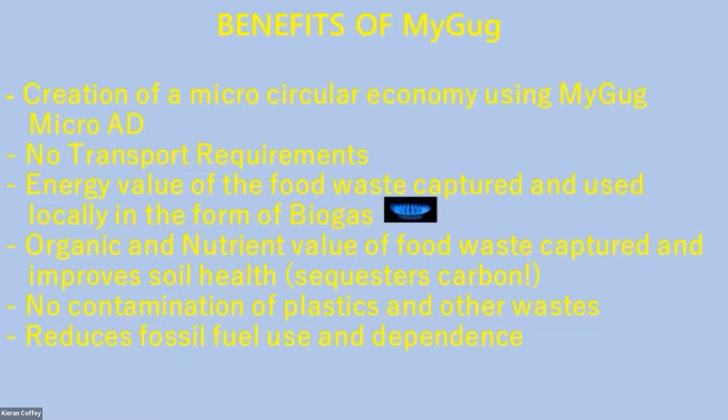And the beauty of anaerobic digestion is that you capture the value of the energy that's in your food, and you can use it locally in the form of biogas. You also harness the organic and the nutrient value in your food, and you can reuse it locally. And there's a big issue with soil health in the world. This will improve your soil health, and it'll sequester carbon.

And one key issue for us is that when you treat locally, you will not get contamination of plastics and other wastes, deeming them useless as well as the food waste. So this is a very important point as well. And with all of the above, everything will reduce your own fossil fuel dependence.

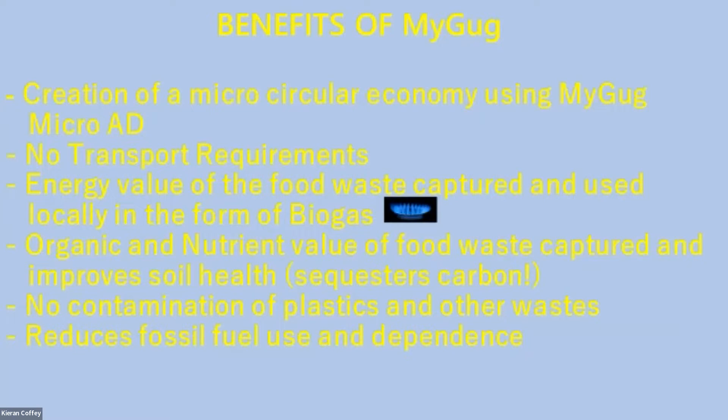Now, as I said before, the big difference is that you get a gas from your digester that you can use locally to cook. And a domestic digester can give you up to 80–90% of your cooking gas requirement. And instead of a solid compost waste that you get from a composter, you get a liquid fertilizer that you can pour directly on your plants and vegetables.

Now, also one huge difference between the two is that MyGug is a full solution for food waste. It'll take cooked, uncooked meats, it'll take liquid waste, whereas the composter is only a partial solution to food waste.

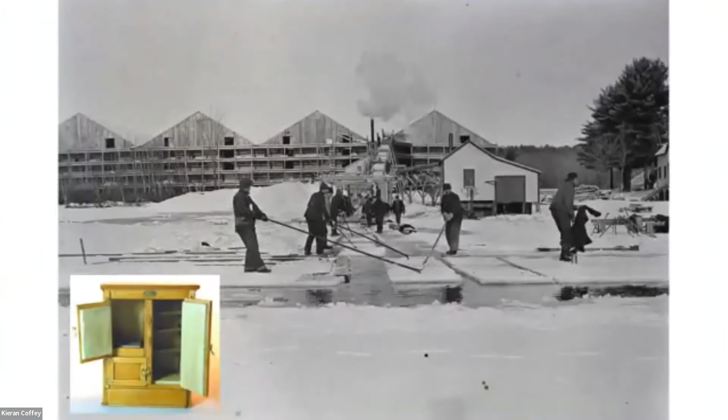Now, the food waste industry is highly dependent on transport, and we want to break that link with transport. And to look at this, we want to look at another industry from the past, and that was the ice and cooling industry. So back in the 1800s, it was common to harvest ice from the large lakes in Northern America and Norway and transport that ice worldwide. And it was used in these types of cooler boxes to keep food cold.

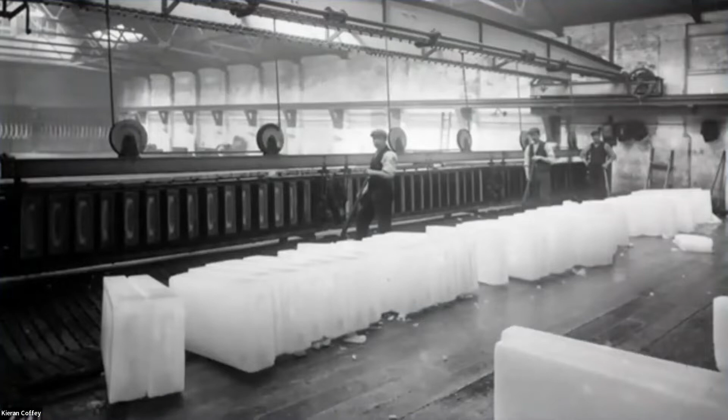The industry then developed in the mid 1800s, and industrial ice making was invented. So there was less requirement for transport then, and these large ice factories were introduced. But a major change happened with the introduction of the fridge in the 1920s. And over the next 40 years, the dependence on transport to transport ice around the world was completely eliminated with the invention of the fridge.

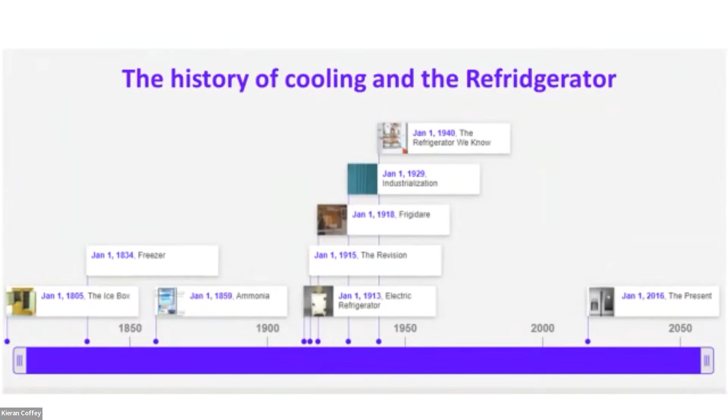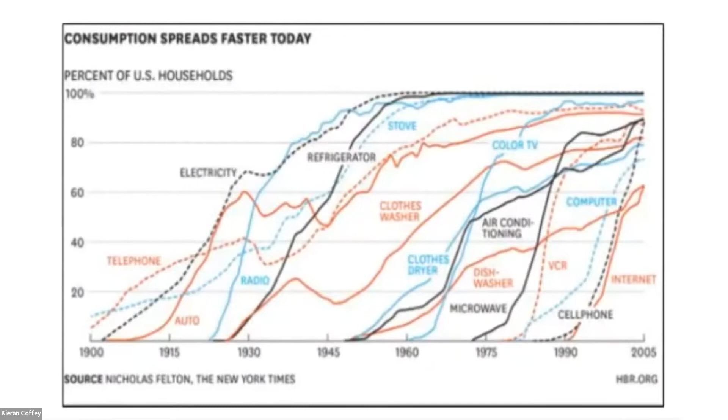And this is the timeline. And so basically in the 1920s, the fridge was introduced, and that completely changed that industry. If we look at this chart here, in the mid-20s, nobody had any fridges, and then between 1930 and 1960 it went from practically 0% up to close to 100% of people using fridges.

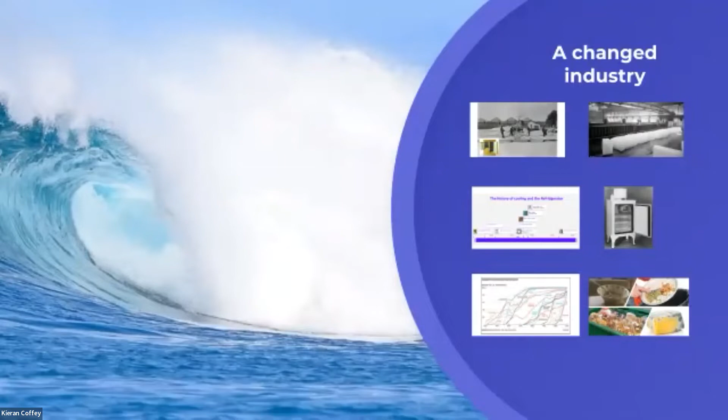So this is an example of where a micro technology completely changed an industry. And we want to do the same with food waste. We want to provide an immediate solution to people to get rid of the really difficult to treat food wastes on their own properties.

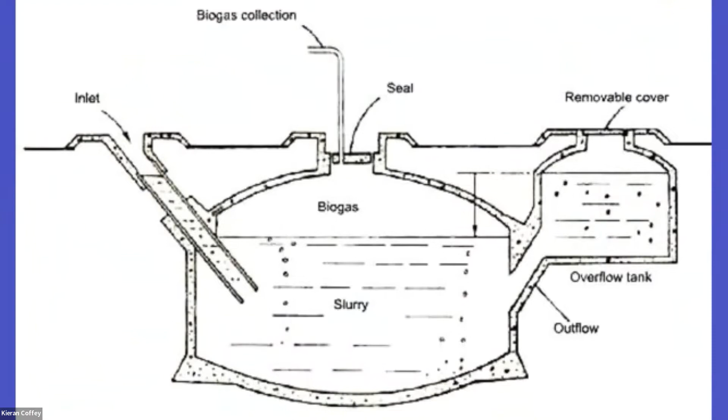Now, how do we provide a reliable system? I want to look first at the system in China. China has probably the most developed anaerobic digestion industry of all, and there are reported to be up to 30 million small-scale anaerobic digesters in China. A lot of them look like this. They're a dome-style digester, similar enough to a septic tank. If you imagine there's reported to be 450,000 septic tanks in Ireland, it does make sense then that there's 30 million of these units in China.

So these units provide local micro circular economies in rural areas all over China, where people can get rid of all of their organic waste, their food waste, their animal manures, etc., and then use the gas locally. Now, all of them are quite large, and they wouldn't suit Europe or the US. So to allow a system like that to work in Europe, it had to be miniaturized. We've miniaturized it by insulating a tank similar to the fridge, where you had basically an insulated container.

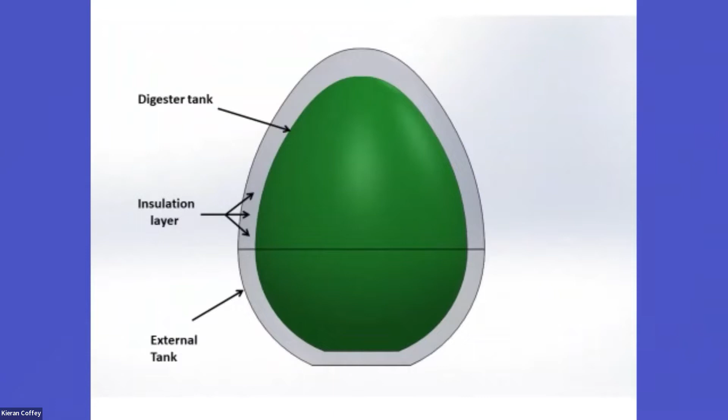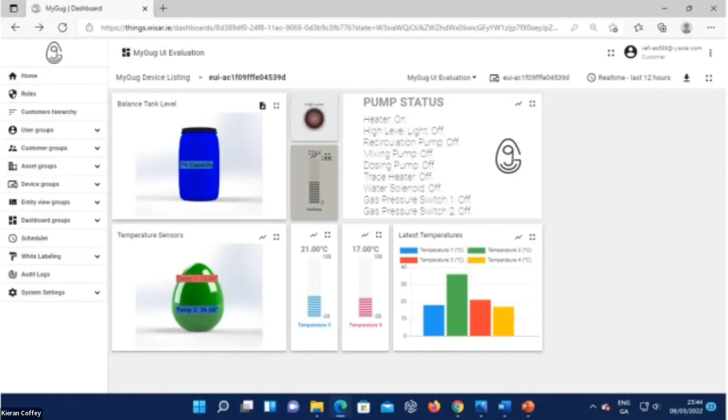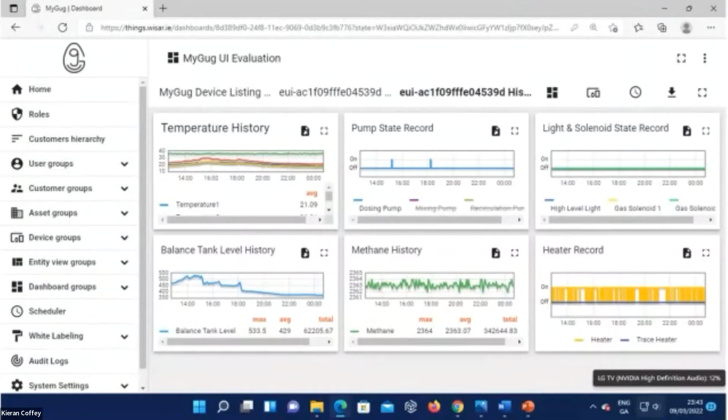We've insulated our digesters, we've provided heating, and we've also provided a huge amount of technology where we monitor the level in the balance tank. Once the food waste is macerated, it goes into this balance tank, and we dose the food waste from this balance tank into our digesters. We monitor and maintain the temperature in our digesters at ideal mesophilic temperatures. And then we monitor the whole process remotely, so we can help our customers if they have any problems. We are basically harnessing the power of the Internet of Things with our technology.

So I'll just show you a video of the unit, if it'll expand for me. So I'll start that again.

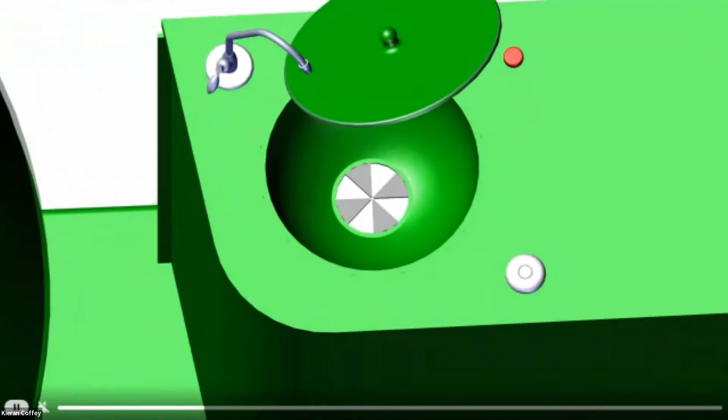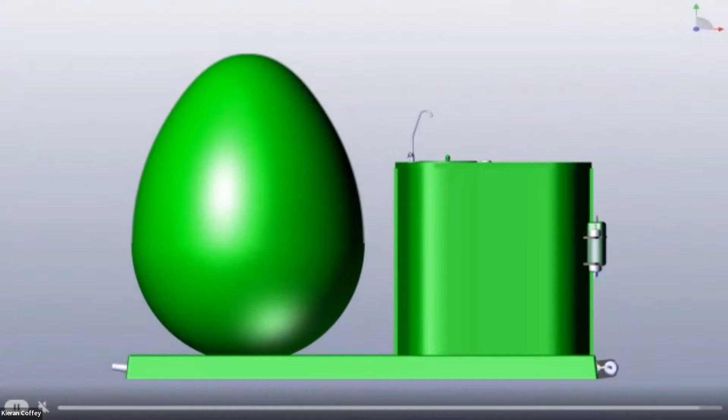So this is our domestic digester, where you take off the lid, dispose of your food waste in and macerate it. It goes into a balance tank. The gas comes out the end of the unit, goes through a moisture trap, and then through a bubbler and a filter. The egg is where the digester is and all the digestion takes place. And then there's a hose at the very left here where the liquid fertilizer comes out, and you're able to harness that.

We provide a range of digesters, not just domestic digesters. The domestic digester will treat about half a ton of food waste per year, but we have solutions up to about 15 tons of food waste per year. As you can see here, the arrangement is slightly different with a kiosk and a sink and a larger egg outside, but the concept and the functioning of it is the exact same.

We'll get past this, sorry.

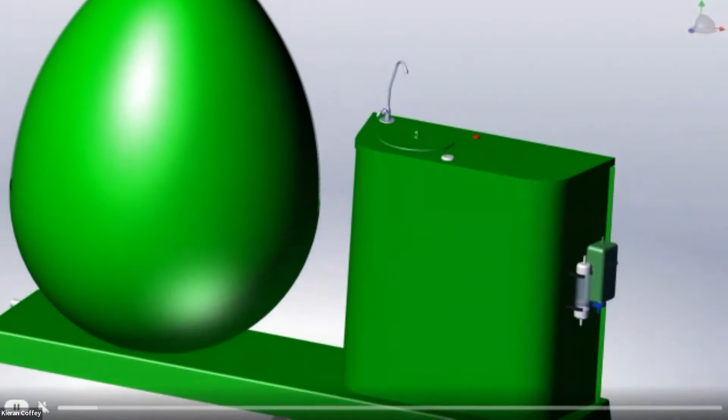So some of the normal questions that we get asked are: is it safe? How much food waste will it accept? How much gas will it produce? Will it heat my house? And why is it egg-shaped? Now, in the unit, the gas is fed into a biogas bag at atmospheric pressure, so there's no danger of that gas leaking into your house. When you have a gas cylinder, it's under enormous pressure, so if you have a leak, the pressure in the cylinder will force the gas into your house. That will not happen with a domestic scale anaerobic digester.

Our domestic digester will treat 1.5 kilograms of food waste per day, just over half a ton of food waste per year, and it will produce 3 liters of liquid fertilizer that you can use. The other question, will it heat our house? We are really focused on using the gas to replace Calor cylinders, so we're focused on using it for cooking. It's egg-shaped because the egg is ideal for mixing, and mixing is very important in anaerobic digestion.

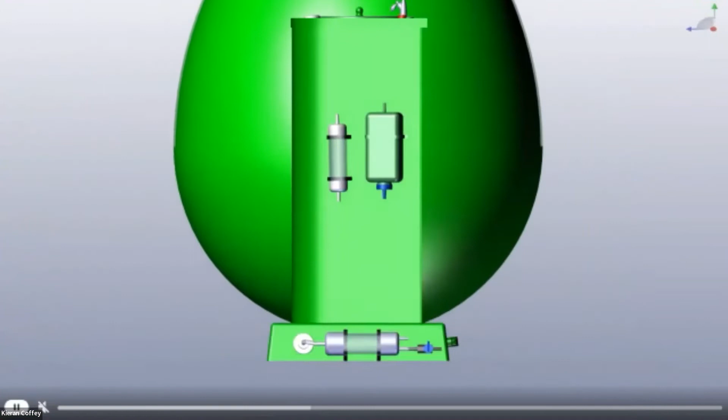Okay, and just a question on that. Do you need to do any cleaning of the gas to remove the H2S or CO2 in advance of its use? On this video, it shows there's a filter here. You can see the green filter, the gas flows through that filter, and we use activated carbon, so that will remove the H2S from your system. That's the only filtering that needs to be done.

Okay, I think we had a similar question from James about the integration into the existing gas cooking system, so that we have covered. Question from John, is the MyGug commercially available? And John is asking, do I size it on the cooking gas I want or the food waste available? And then he's asking again the similar question many others have asked, can I add non-food, so grass or offcuts, to it? So no, you size it based on the food waste that you're generating.

And again, like I said earlier, liquid wastes will come into this as well. So if you have yogurt or milks or juices or anything like that, anything with sugar in it, that can all go in as well. Generally that's not considered a food waste, but anybody who gets rid of waste milk or milk that's gone off, they'll pour it down the drain.

And that then ends up in a wastewater treatment plant, and 1 litre of milk has a biological oxygen demand of about 30,000 milligrams per litre, whereas a litre of sewage has a BOD of 220 milligrams per litre. So it puts a massive strain, and there's a cost on the wastewater treatment plant when liquid wastes go down a drain, whereas in our system, you're harnessing the energy in it and you're using it, and also you're harnessing the nutrients.

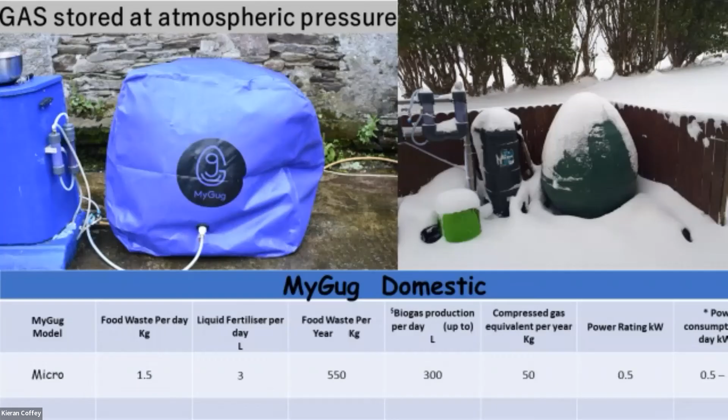The big disconnect here is, you know, people are used to gas in cylinders where it's completely compressed. If you release that gas into the atmosphere, it'll take up a much bigger area. So, to give you an example, the 1,000-litre bag that I showed here, about 20 or 22 of those will have the same amount of gas as your standard yellow gas cylinder. So 300 litres is 1/3 of this gas bag. At atmospheric pressure it sounds like an awful lot, but that would keep you going for about an hour to an hour and a half of cooking.

Okay. And Robert says that he assumes that these values have been verified. I think you have the unit yourself, so you can send over your outputs, and these must be based on more starchy inputs, he says. So obviously the quality of the inputs would affect the volume of gas output. Yeah, look, there's a standard system called volatile solids, and the volatile solids in different foods vary, but for food waste, generally about 5 kilos will produce about 1,000 litres. 5 kilos of general food waste.

Okay. Question from Liam: is there a demonstrator unit to bring on site, or where can a unit be viewed? He's a Northern Ireland-based attendee. Sorry, I missed the name, Sean. Liam. So Liam, is there a demonstrator unit available? We're hoping to start putting demonstration units around the country to allow people to touch and feel and see how it works. Maybe in 6 months' time, Liam, hopefully. Okay, Liam, maybe you should get in touch with Kieran through mygug.eu and have a chat about seeing a unit.